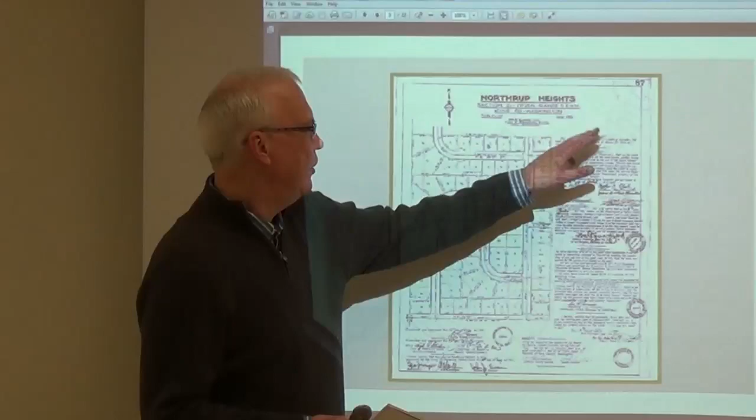Now, here's a description probably for an easement within a subdivision lot. In here, the preamble is just reciting the plat, meaning the lot, and the recording information for the plat. No reference to the section, township, and range until, ta-da, here's that plat. Now I can't expand it here, but right in this area, it says description, and it's described as some portion of the section, township, and range, with reference to some meridian.

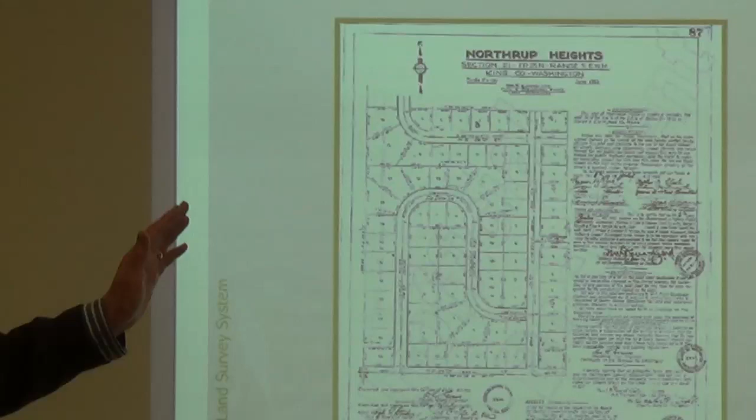So all those things in common, they are unique to any boundary survey within our public land survey system. And when we're in the office and we are charged with performing a boundary survey, that's what we're after, to retrace that parcel, and that parcel is described just like those descriptions show. There's a strong reliance on the description. A serious responsibility in how we write them, which will be another course for you a few weeks from now.

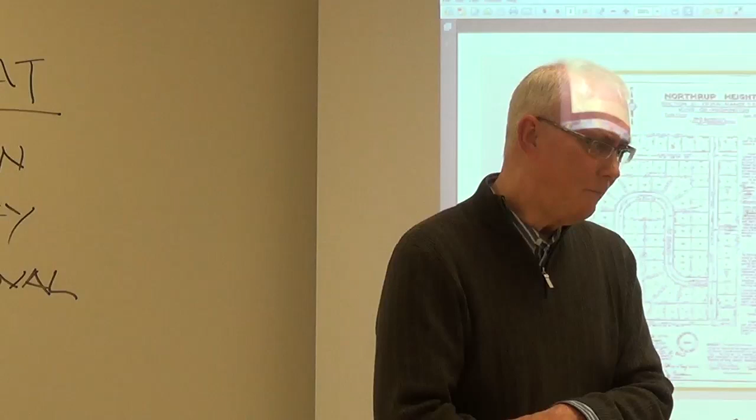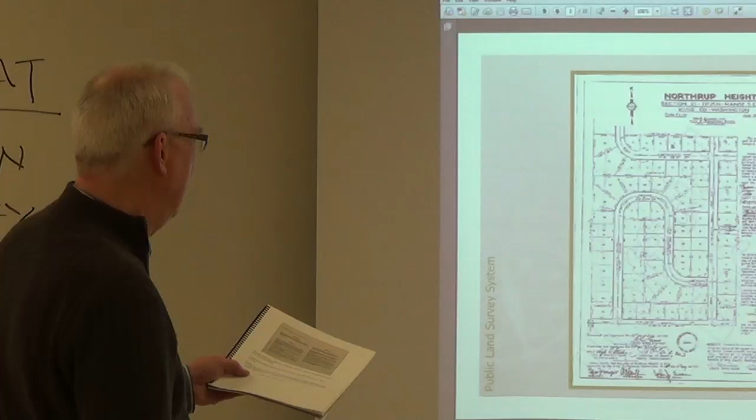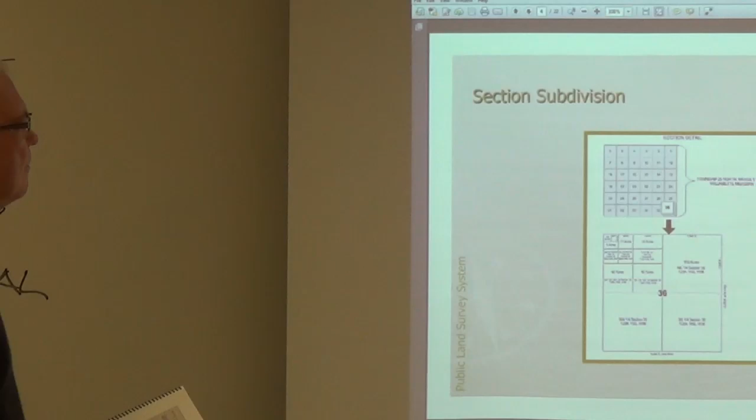But what those descriptions do, or excuse me, how they're structured, is based off of the system that is over 200 years old. And that's what we're going to try to get our head around tonight. The system that I speak of, we'll see this in a minute. The system covers 30 states out of the 50 that we have. And we'll take a look at those 50 in the context of the system a few slides from now.

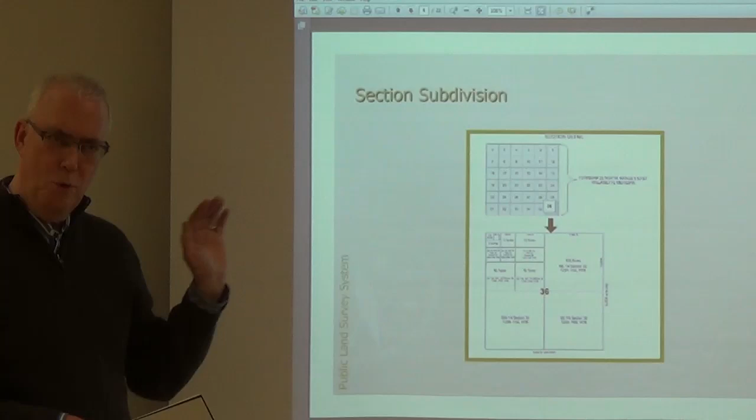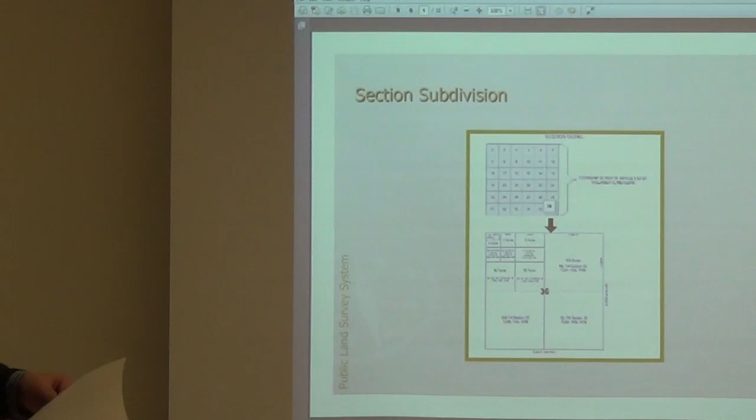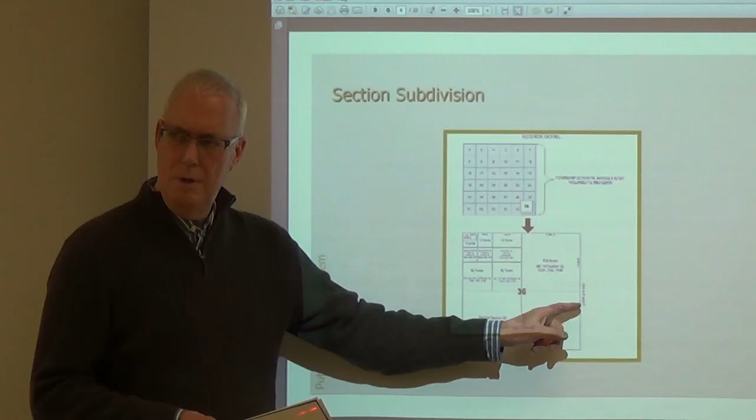But I started off by saying that the unique elements of the legal description that we saw are section, township, and range, in reference to something. The next 3 slides I'm going to be jumping back and forth with. Section. This is showing one section out of 36. It is defined as a nice square box, 640 acres in quantity. It is a mile square. It is controlled by 4 section corners, at each of the 4 corners, and by 4 quarter corners at the midpoints of the sides. They're called quarter corners even though they're in the half-mile section, right? It's a half mile here because they divide the section into quarters.

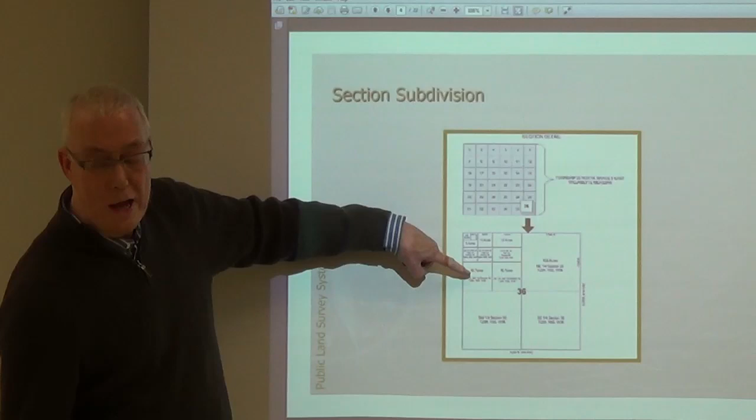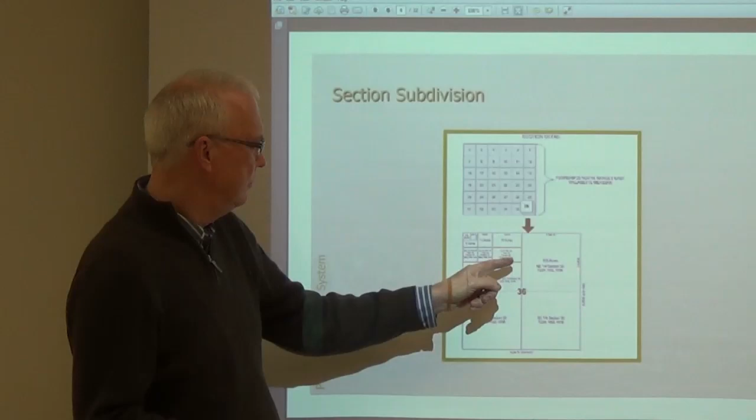This is the further subdivision of the section, where this is the southeast quarter of section 36. This guy over here is the southwest quarter of the northwest quarter of section 36, and is an example of the very first description we saw in the first slide, the aliquot part. Note that this section is 1 of 36. They're all a mile, so that makes it 6 miles, north and south, east and west. You put the 6 together in that nice little 36 section box. That's referred to as the township. Section, township, and range.

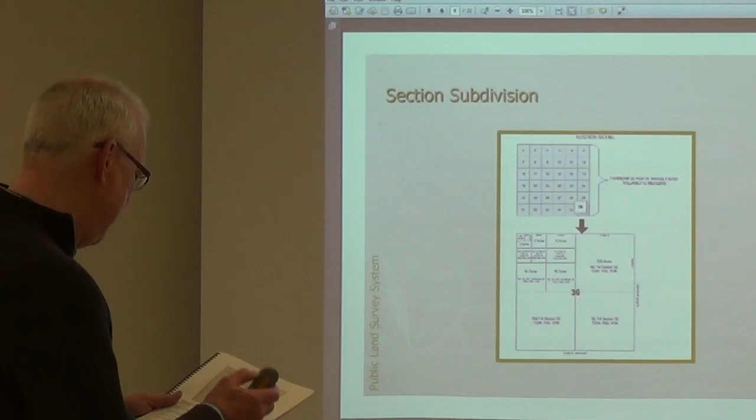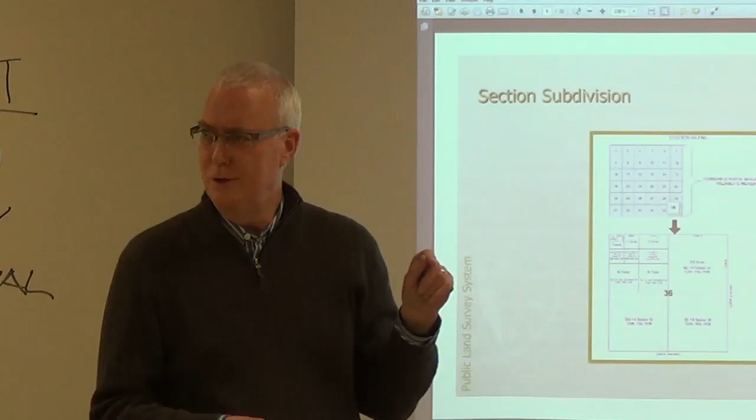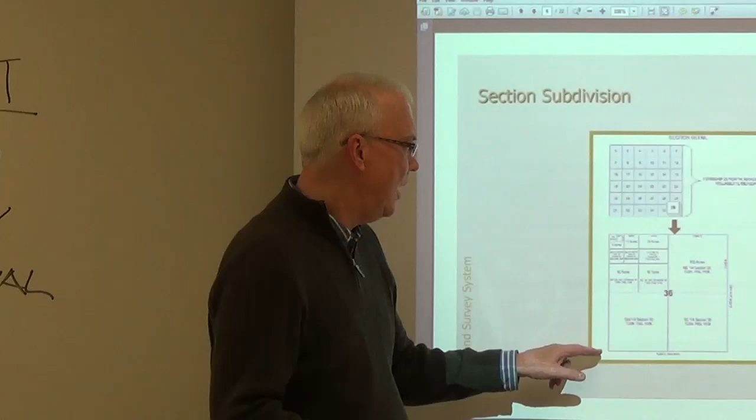A note as to the units of measurement. I said a mile and half mile and so forth. In the day, they didn't measure with pocket tapes, they measured with chains that had links in them. And the chain was 66 feet long. And within the chain, there were 100 chain links. So we have links and chains. When you multiply 66 feet times 80 chains, you get 5280. So when I'm saying that this is a mile square, or 5,280 feet, these original surveys were measured in 80 chains and 40 chains. So throughout our discussion, we're going to be talking about 80 chains east and west, 40 chains north and south, and on and on.

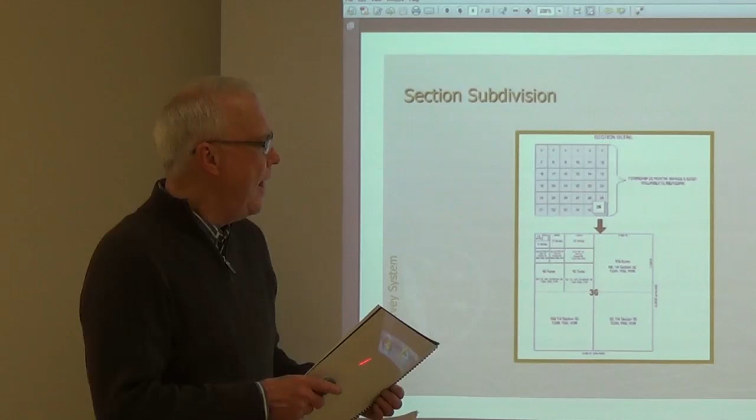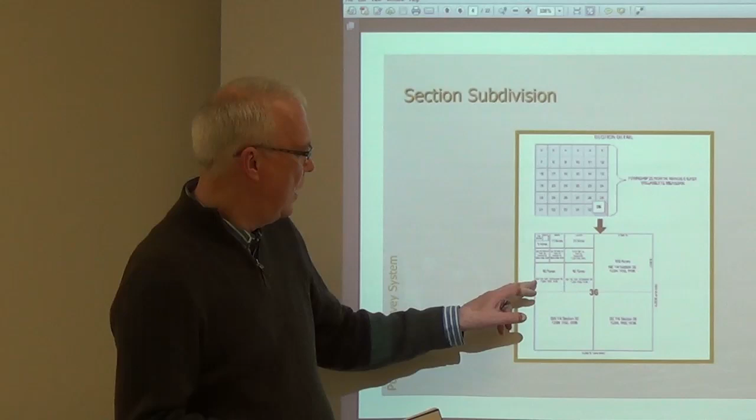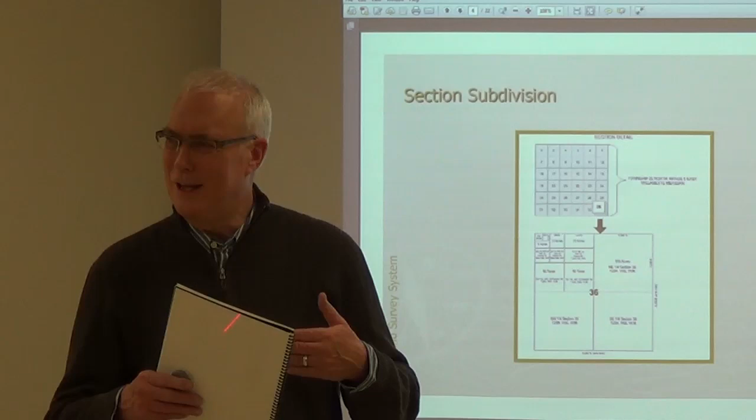I use the term aliquot. It's a Latin word. And the definition of that means a division where there is no excess or deficiency. So if I put something in here and say that this is the southwest of the northwest, it is, I should turn it on. Okay. That's suggesting that there is no remainder. You know, if we were to say the east 300 feet as opposed to the west 300 feet, and you only have 500 feet in there, you're going to have an overlap in there. So that's what aliquot parts does not run into.

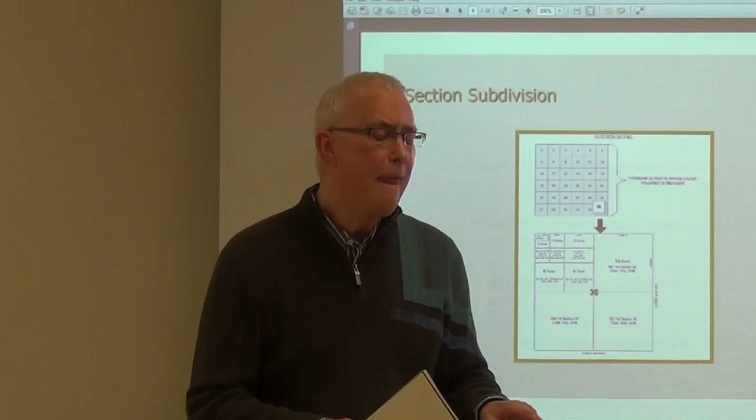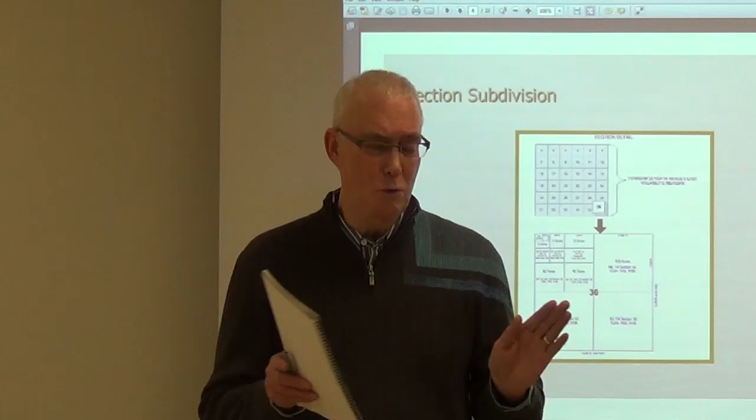This distance, again, this is the half mile, so this would be a quarter mile, 20 chains, 1,320 feet. That is a distance that would have been considered as 20 chains when it was done. 1,320 feet, but who knows? It could only be 1,200 today because of the way the section was originally surveyed compared to how it was described and how we find it today. But whatever the distance is, this is the key, is that the same principles go into it. It's divided in the same way that it was originally, so that there's no overlaps and no gaps. That's the feature of the rectangular system. Part of its design, no overlaps, no gaps, just like the design of a subdivision.

Look at a plat that's got 30 lots in it, 1 through 30. You look at every lot in the control of the boundary. And it's a matter of equity that no one lot's lines has seniority over the one next to it, because they were created at the same time. From an equitable standpoint, one has as much located right as the other, as opposed to a junior and senior title situation, where this one was here first and this one came later. That's a sequential development. This system and the plat system are referred to as simultaneous. The lots happen in the same moment of time. These things happen in the same moment of time. There is no overlap, there is no gap.

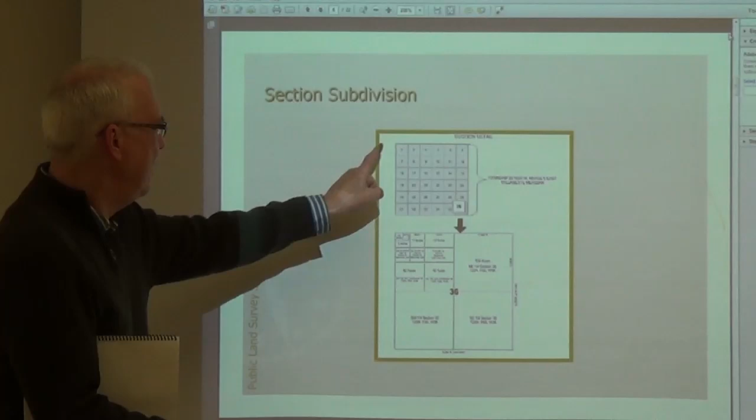So, this guy right here, township, blown up is this. 6 miles, 6 miles. And if that was the design, there was a way to survey it. Consider the plat. You might have a boundary in. Next thing to do is you typically are going to survey the roads in, whether it be for construction or when you're finished with the whole thing, to start staking the lots. The road goes in, it sets a control from the road and the boundary, you're going to start setting lot lines.

Similar thing here too. Now, this is referred to as a manual of instruction. And when these things were done, with the design and a survey, they had such instructions coming to the General Land Office. And when I make reference to that, I'm talking back shortly after the Revolutionary War. That's how old this stuff is, this sense of design and the way to survey. And so this is what came out of the first published manual.

The manual is a distinct term from instructions. Instructions are how things started. Special instructions to Surveyor General. Then we went to a manual. The first manual was published in 1855. And that's how this area here was surveyed. So these kinds of things, instructions, are from that.

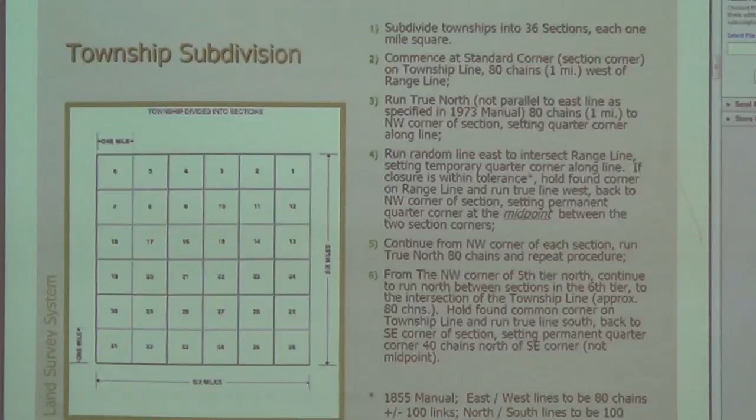But I think it's important to see that what was done in this way of surveying, starting with some control lines and then concentrating it into smaller units, is again taking the design and how to survey it in order to control the error. That sounds smart. Rather than just get on one end and throw everything to one area, which we'll see was done, but that error was contained. So I'm going to take one more slide here, back here at section, township. I'm going to jump ahead now.

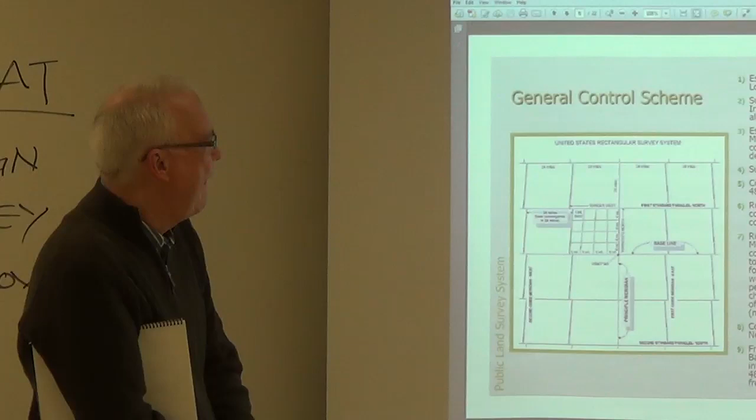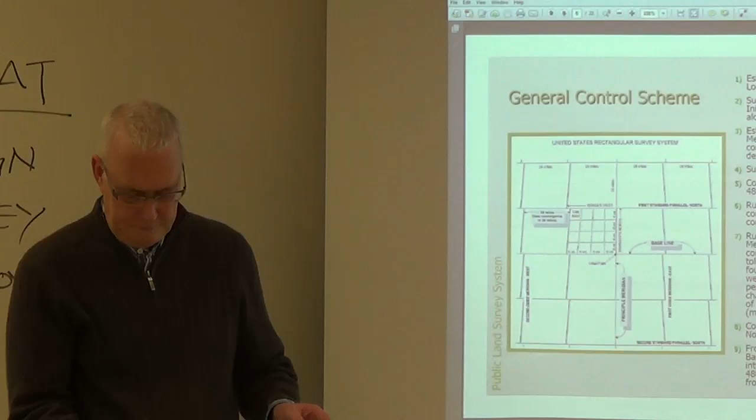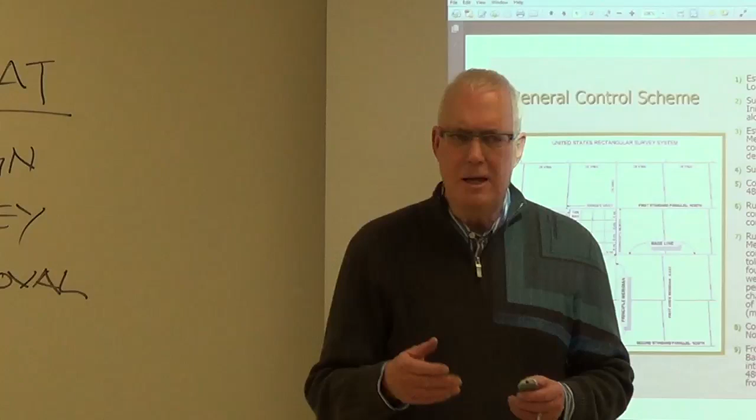One of those 6 mile squares, or each of those 6 mile squares, is shown here in your slide. Each one of those is 6 miles, and with each one of those are the 36 sections. That's how dense it is. Now, if you can appreciate that in a usual fashion of surveying, we want to have a sense of where our control is. And when we're thinking of traversing, we might make an attempt at traversing on the perimeter of something. And then from it inside, work to our topography survey or to our staking or things like that, rather than having either no control or some single line and then just flying things out.

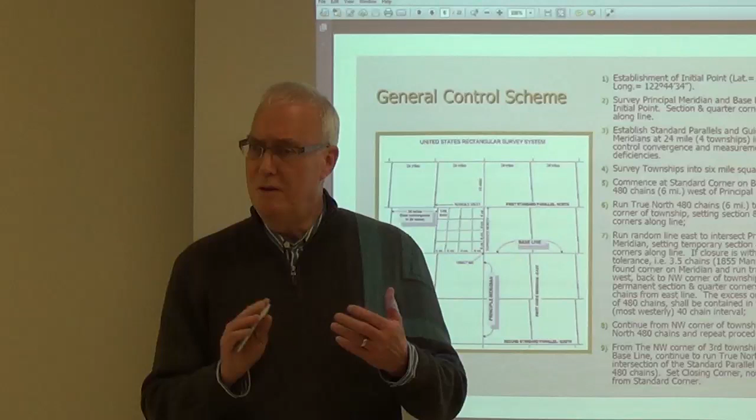If we have the chance, so please don't go back and tell your boss Harrison says this is the way to do it. I'm saying when we have an opportunity, either through the GPS network or from conventional total station work, to have a control loop or polygon configuration, such that that controls the area which is within it. This demonstrates the same thing. So this is how it was. This point right here is called the initial point, and that is the position by which the entire system begins.

Now, I said that there were 30 states that cover this, and boy, I'm going to forget for the moment how many initial points we have. Maybe I can find it here. That would be important to have here. Is it 31? Okay, 30 states, 31 initial points. So therefore, over the various states, some have more than one, but then there's sometimes an initial point that covers several states. We're on the Willamette system here. Don't confuse the number of systems being 31 with the number of states being 30.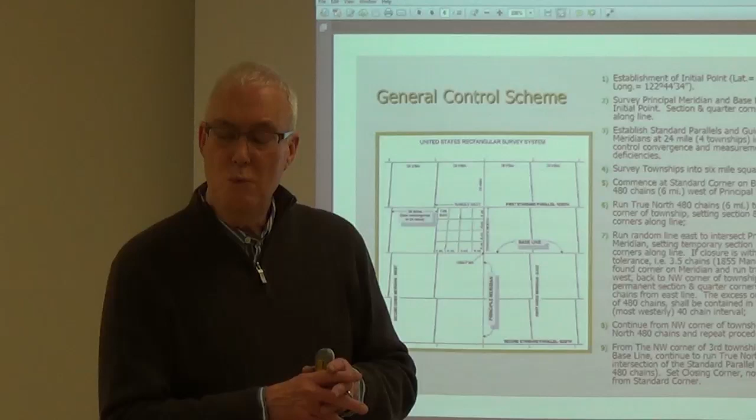What I do mean to say is that for the sake of developing a system by which land was going to be conveyed from the federal government into the private sector, it was determined to put an initial point. I don't want to say arbitrarily, but it was subjectively determined where to put it based on the agricultural and demographic area that the surveyor was trying to determine how to deal with the settlers and facilitate land sale. So we find, and we'll look at that a little bit later when we get into our history, that this area for us was just west of downtown Portland. But regardless if it was in Portland or in Kansas or in Iowa, this is the way it went.

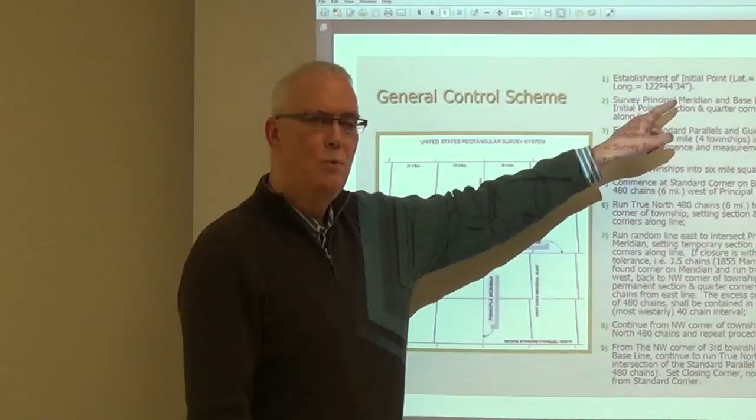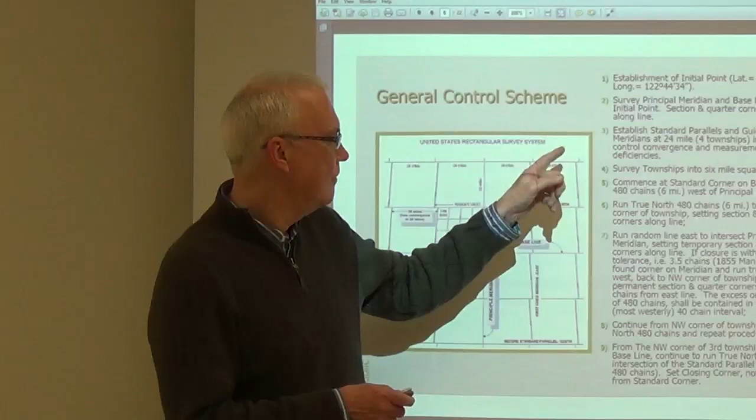An initial point went in the ground based on the Surveyor General's determination, this personal one. Celestial observations were made, and that was the position based on a geographic coordinate. From that, true north was set in the ground. From that, true north is run. Principal meridian, that's the one that's going up and down.

It's on true north. It's run north and south. It's given a name. So there's 31 names. Ours is Willamette. And as it was surveyed, section corners and quarter corners were set along it. So a contract went out, a bunch of guys got on that line, they turned north and up they went. Every 40 chains and every 80 chains, they set a monument. Boom, boom, boom, boom, boom. Then,

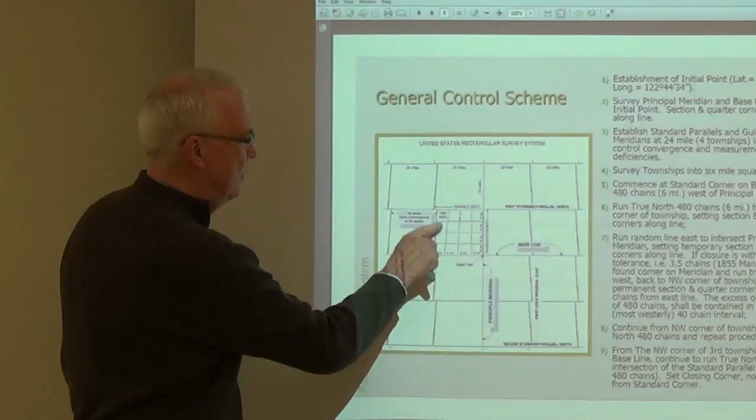establish standard parallels and guide meridians at 24 miles to control the convergence. So if you could appreciate that you get out here and you turn true north like we're supposed to do, it starts curving in. And if you didn't do this, which you see comes out here, this came out 6 miles, 24 miles, so does this. And we'll see that this top quarter does not match that quarter.

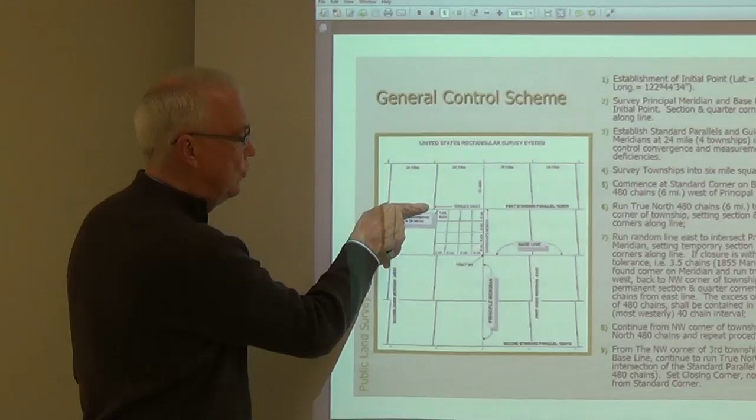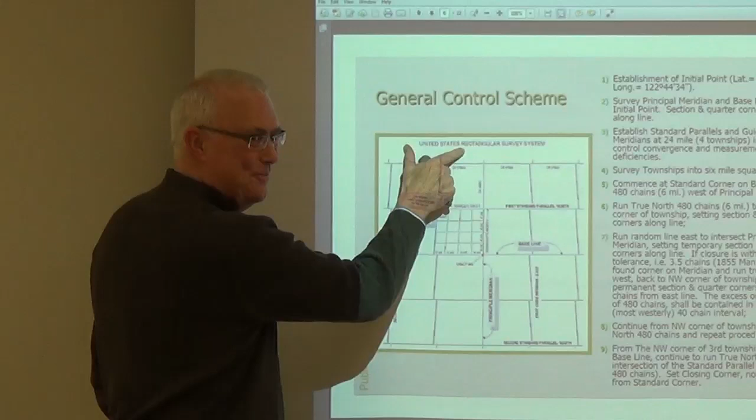So the object was to control the convergence, rather than have these things just get smaller and smaller until we get to the top of our meridian. Every 24 miles, he said, okay, let's get out there and start it again. Converge, converge, converge. Get out there and start it again. Every 24 miles, a standard parallel was set.

This area, up where I work, is the 6th standard parallel. That runs through Southeast 8th. The 5th standard parallel is the jurisdictional line between King County and Pierce County, coming out of, we'll see a picture of it, the south end of the Sound at Fox Island. So you can appreciate that if we're 6 standard parallels times 24 miles each, we get a sense of how far we are north of Portland. That math works together.

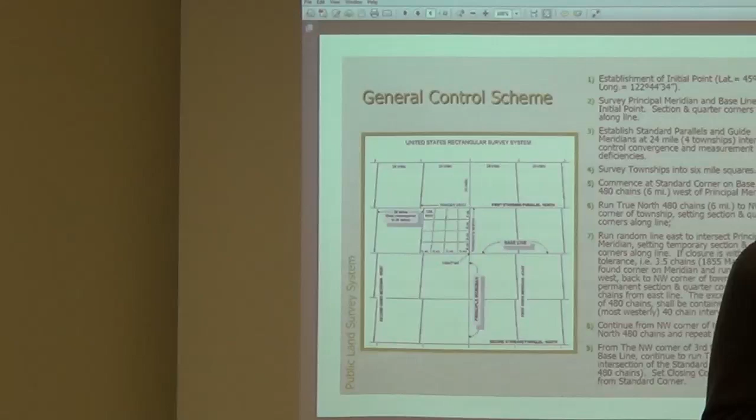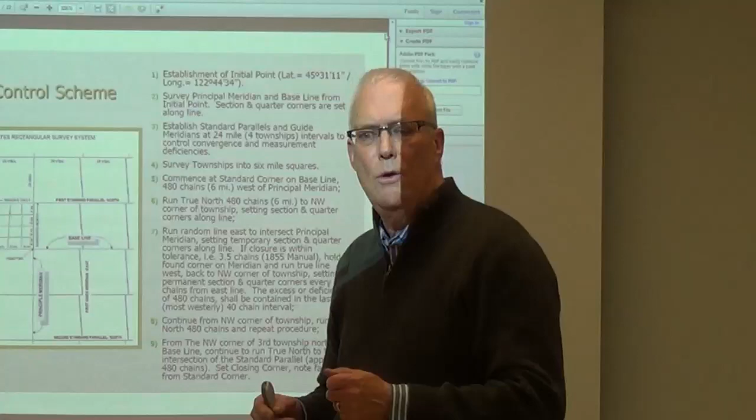Survey, so here we have the control. You know the loop I was talking about and the plat? You've got a central one. Oh, perhaps I didn't mention the baseline. When the north-south meridian was done, the east-west baseline was done. That's given a unique name too. It's called baseline. And so we have the Willamette meridian and the baseline converging at the same point. And where I said that the meridian is a true meridian going to the pole, the baseline is a true line of latitude. So it's a big curve.

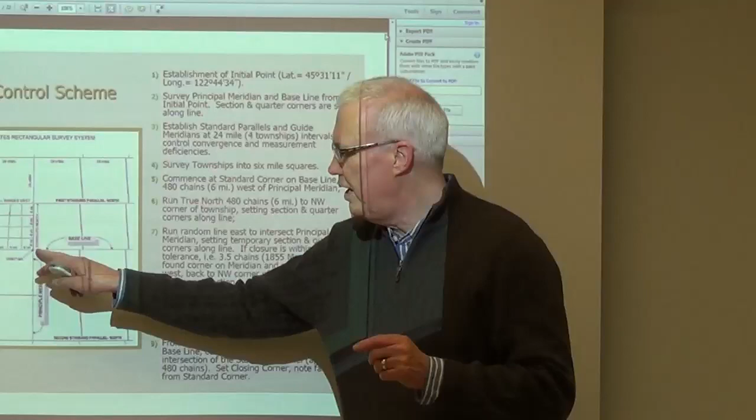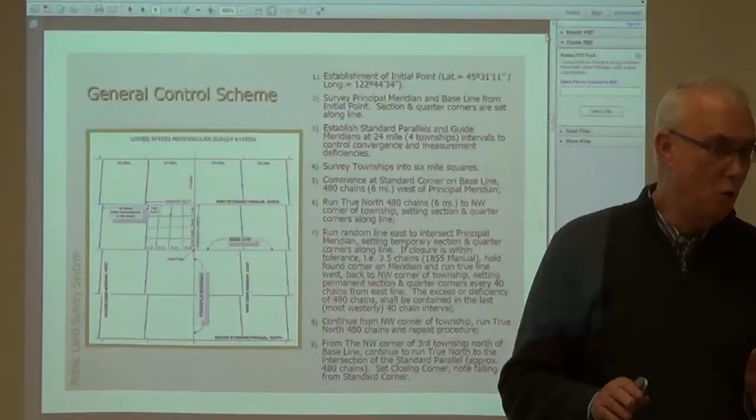And the manual gives instructions on how to survey a curve. So though we see it as straight, those surveyors at that time didn't just go down a quarter mile, plunge the scope, and go another half a mile, and keep doing that. They were constantly using one of 3 methods, deflecting around as they're setting every half mile and mile in each direction. They're setting those quarters just like they did north and south. Where they're plunging the scope or checking their true north orientation running north and south, the guys running east and west are actually running the curve. That set up the control.

Once the control is set, here we have every half mile, these great big 24 mile squares have quarters and section corners set. They're the first things that go around. One contract, done an area at a time. Then start over. Come back here. This is where we're into number 4: survey townships into 6 mile squares.

You get on this, the instructions tell you commence at a standard corner on the baseline. This one out here, 6 miles, has already been set. You go out through the brush, 2 years later, you find what was done at that time, and you say, okay, I am on number 5. I am 6 miles west of this principal meridian. Now I'm going to run true north 6 miles to the northwest corner of that township. Every 40 chains, every 80 chains, quarters go in the ground.

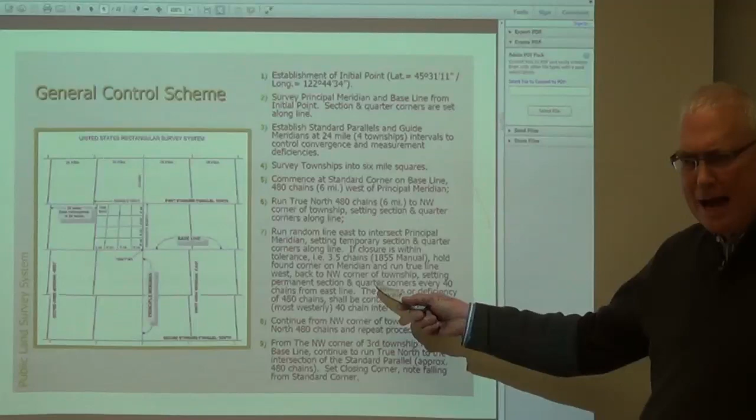If they are, that's good news. They've closed. They jump to that corner, the found one, and then brush line all the way back. Do I say it here? Hold the found corner on the meridian and run true line back to the west. I kind of visualize a little triangle sliver in there. One was a random line going to the east, now we're on true line going back, because we were within the 3.5 chain tolerance. And as we go back, we're setting permanent section corners and quarter corners and setting the accessories that go with them.

Typically, and this is what I found working in Oregon, they are bearing trees. We have some pictures of them here, if you're not familiar with what that looks like. A substantial tree that the front bark is blazed off to the cambium area of the tree, and it's scribed with particular information with a scribing tool, such that that evidence will grow over and heal and perpetuate for years and years. Principally because, at least in this area, you would choose an evergreen tree, and that pitch would preserve it.

The corner might be long gone, but in a section corner we would expect to find 4 bearing trees, one in each section. In a quarter corner, we would expect to find 2, one in each section there. So as we run back, because we're setting them exactly at 40 and 40 and 40 and 40 chains for 6 miles, there's going to be some distance there when we get back to our northwest corner, the one we just left. And that's where that error is left. The excess or deficiency of the last 40 chains is left there. That's kind of a key point.

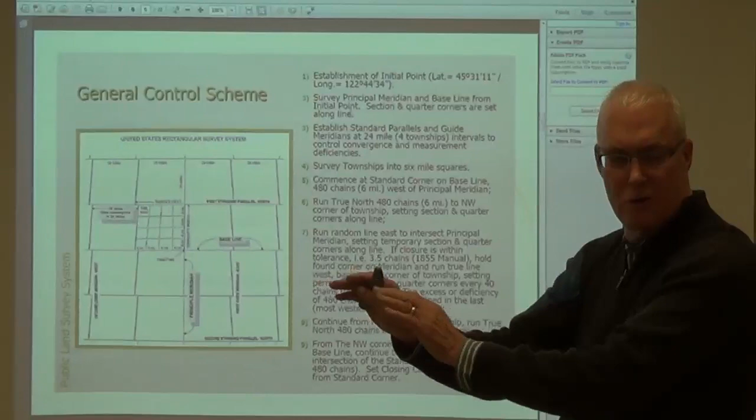We're going to see that error, excess, and deficiency is always left at the north and on the west of this system. Everything else within it, theoretically, should be a half mile. But because of this convergence, and we're surveying square boxes, you can't have curved lines and square boxes everywhere.

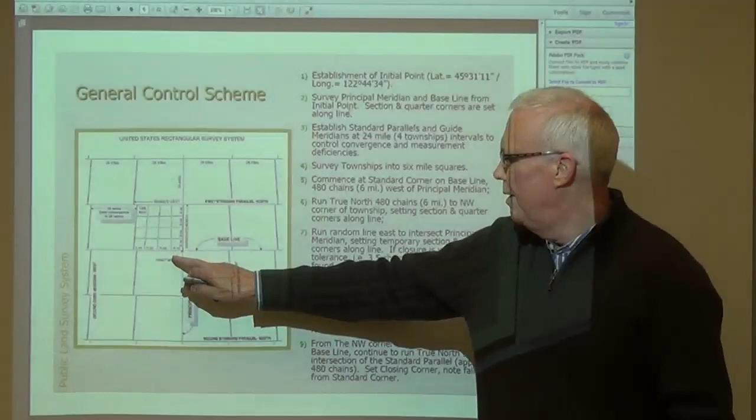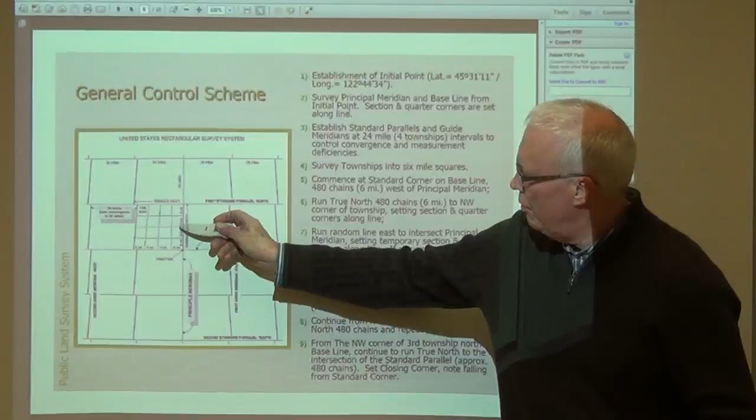We're going to continue this up and over, like we just talked about, up and over, up and over, up. Oh boy, here's the last one now. We get to the top, the north, run true north from the northwest corner of the 3rd township, that's right here. This is 1, 2, 3 township, northwest corner is right there. So we have one more to do, which tells us to continue to run true line to the intersection of that control line, that standard parallel that we set.

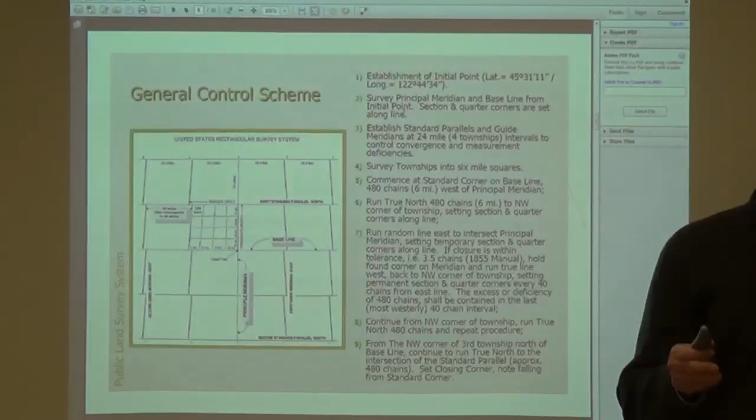We're going to go to that, and we're going to find a corner up there. That corner that we find is called the standard corner. It's a standard corner because it was set on the standard parallel. But we're not going to hold it. In this instance, number 9 here, we're going true north up, and we're going to set a closing corner, noted here. The distinction is that the closing corner controls the north-south lines of the sections below it. The standard corner controls the position of the sections going north.

Now the distance east and west between them was always noted in the notes, how far it was in chains and links, showing again that it was closing. It was important that it close no farther north or south than that line. So the idea was to get on that line and then tie the corner that they found. The distance between them in our area is, I'm going to pick a number, like 50 or 60 feet.

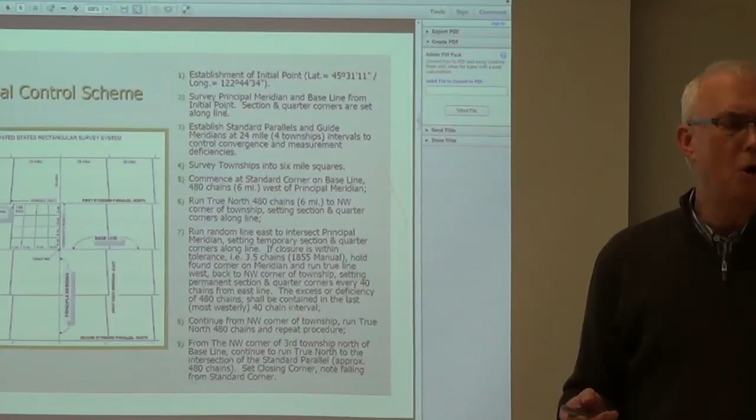In my area of town, on the west side of 405, south area, southeast area. And I mentioned to you earlier that the 6th standard parallel is in that southeast area. There's a parking lot called Wilburton Parking Lot. The standard corner is in the park and ride area, out of the street section.

49 feet to the, excuse me, that's the closing. 49 feet to the west is the standard corner, and it's missing. It's been there since I've been around the city, but through construction it's gone. But it's been well tied into our network, and we have lots of data to show where it was, and it's used in our calculations and retracements.

So when I point out, what I'm talking about is this little jog up here. You see the jog here? That jog exists in every one of those corners up through there. And it is a lesser degree within the control, the greatest degree in the extremes. But that's what we see as far as how to control the error.

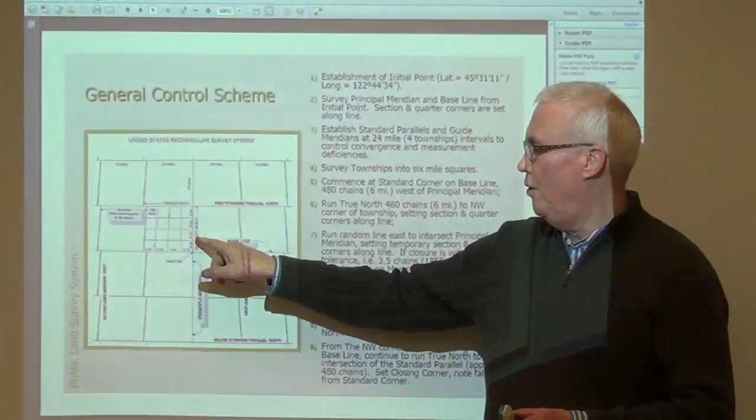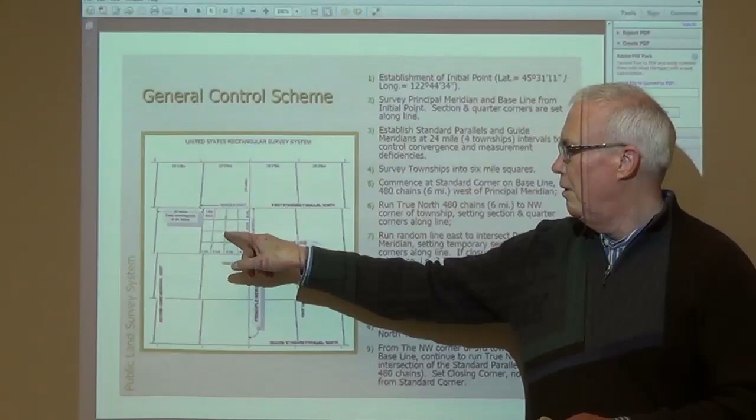Now, I'm going to summarize again. We start at a node, we go up and over, check in, come back. Up and over, check in, and come back. We do that all the way up, and then we start out here another 6 miles, up and over, and check into the one that we started our discussion. Back, up, and over random line, back on true line. Same procedure there as it is any place over here.

Now I'm going to go back in the slides. Here. It's almost a repeat. Again, these are published instructions. We're going to take one of those 6-mile things. We started there. This was the initial point. We went out and found the corner 6 miles away. We ran up 6 miles, setting each one of these as we went up. Came over random line, setting temporaries, checked in 3.5 chains, and then came back true line, setting each one, and left the error over here.

So check it out. Subdivide the township into sections. Each one is a mile that we're talking about. We're going to commence at the standard corner of the township line. 80 chains west, 1 mile. And even though I'm just going to talk about this one tier, this whole thing applies whether here, over, or here, and over, and so on and so forth.

Run true north. Now this is an interesting thing, is that in the 1855 manual, I noted here, it says run true north, yet the current manual and the predecessor to the current manual, this is where I kind of cut my teeth over the last quarter century, says that it should be parallel to this. So there's a distinction. One's true north, which is a different bearing coming up here than this bearing over here. But at least the original instructions, and that's what we're talking about. The original design and how to survey.

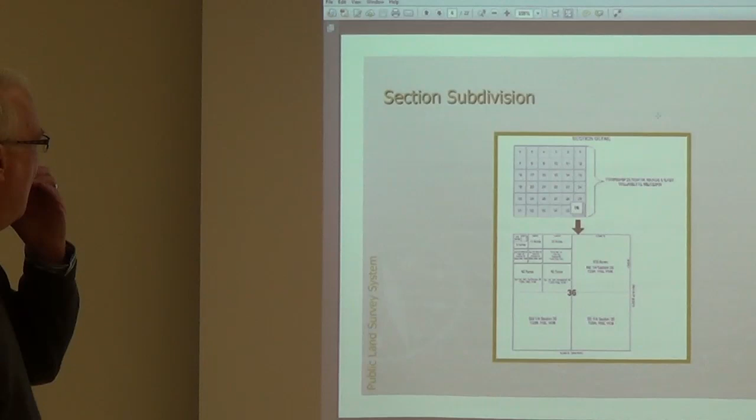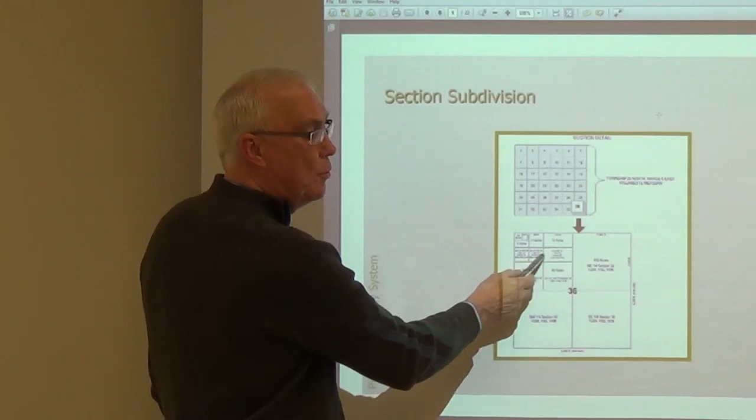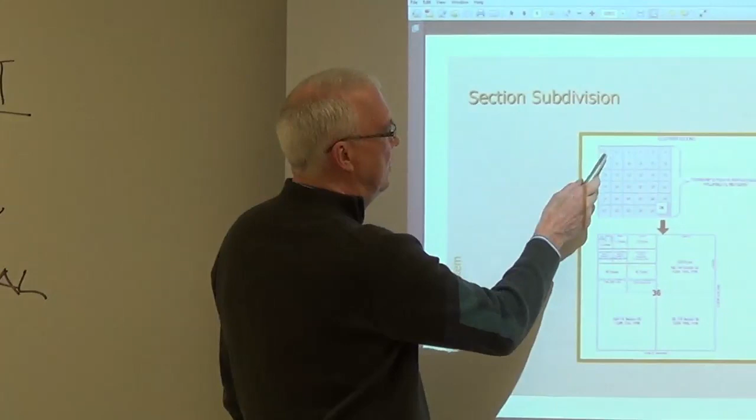We just got through talking about this. Each one of these sections, all through here, can all be broken down, can all be described just like this. A quarter, a half, a quarter, rest 3/4 of a quarter in the same way. But when we get to 1 through 6, 7, down this tier here, we can't describe it in the same way because we have lotted sections. That's where the error has been thrown.

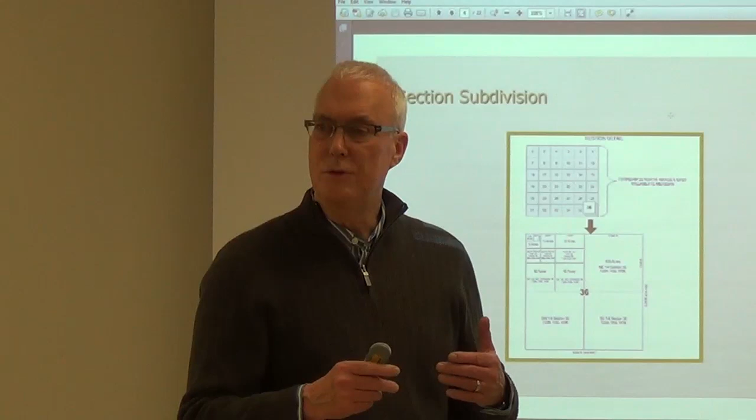And we see what those things look like in what's referred to as the original patent survey that came out of Washington, showing what the survey was about. And I think I have some samples of that in your slides. What was surveyed was less than what is actually depicted on the plat.

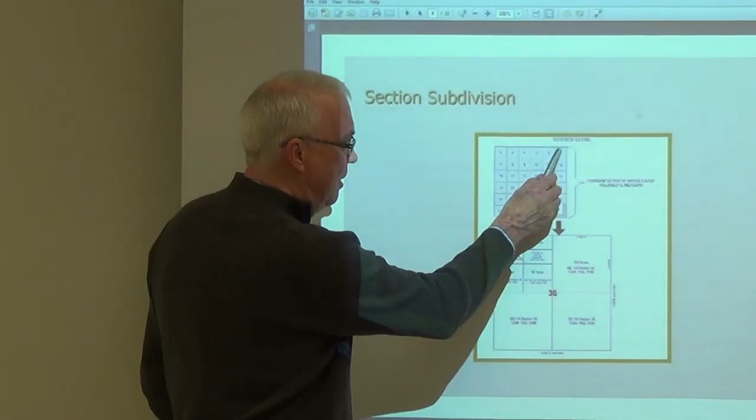I'm telling you that the surveyors did not set, if this was section 1 up here, I'm telling you they ran up here, they found the corner, they came true line back, and they set this quarter here, 40 chains north, but that probably left this short. And so in that, they set those, but they never came across and set that there.

So what we see is that the patent survey not only shows this line, but shows lot 1, lot 2, lot 3, lot 4. And that's what's called the cartographers' or the mapping lot that's in there. It's drawn with areas and with dimensions, not surveyed. And that we find in the top tier, all through here, and all the way down there.

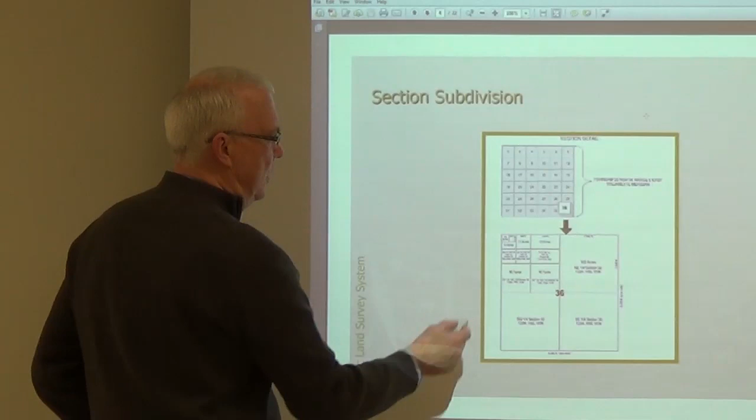Okay. The design is the scheme, how it was laid out. The design shows how the error is to be controlled, and the instructions go to support how it's to be surveyed. Certainly equipment was designated. When we read the contracts, it shows what guys are paid and who does what. But let me pause with that.